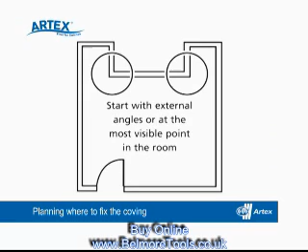Plan to start fixing the cove at the most visible point in the room. If external mitres are required for, say, a chimney breast, begin with them to ensure the best pattern match of decorative plaster cove. Alternatively, if using corners, then these must be installed before commencing installation of the cove.

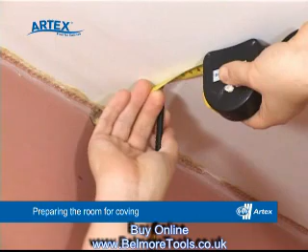Prior to the cove being installed, the walls and ceiling should be prepared. Remove any wallpaper and wash off any wallpaper paste and any traces of distemper, loose or flaking paint and plaster to ensure the surface is sound. Pencil guidelines along the wall and ceiling. The measurements will be dependent on the size of coving being fitted. On long runs, it may be advisable to flick a chalk line between the guidelines. To ensure good adhesion, score the area between the guidelines.

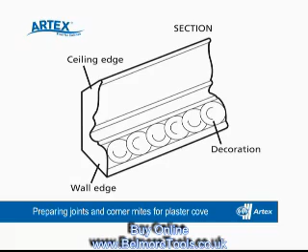Note which way up the decorative plaster cove needs to be fitted. When fitting decorative plaster cove, it is important to take care with the joints and corner mitres in order to ensure good pattern matching. All measurement marks must be made on the cove wall edge. Always try and match the pattern on butt joints and external mitres. Any mismatches may be lost in the internal mitres.

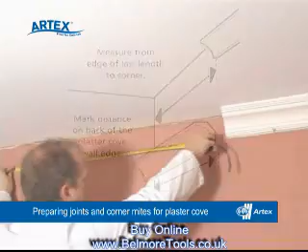So, whenever a mitre is required, measure the distance between the end of the last fixed length and the corner of the room. Mark this measurement on the back of the wall edge of the next length of plaster cove. When cutting two external mitres on the one wall, for example a chimney breast, a compromise on pattern matching may be necessary. Mismatching sections of the design along the meeting edges can be trimmed as required.

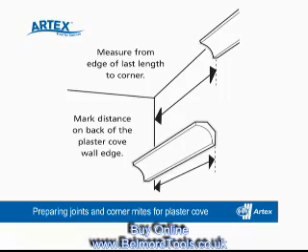When joining two pieces of decorative plaster cove, it is best to use a straight butt joint method. To cut a butt joint, place the cove in the mitre block and line up the measured mark with the upright edges at the stepped end of the block. When cutting, keep the saw lined up against both edges of the mitre block. Any gaps may be made good by using the adhesive. Once dry, these areas can be easily sanded to leave a smooth, joint-free finish.

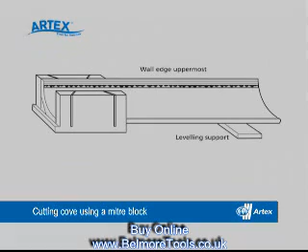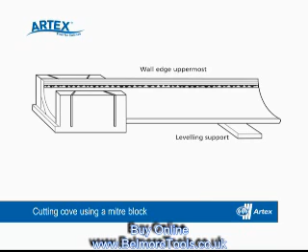When using the Artex mitre block, it is a good idea to keep the cove supported and level using a piece of wood the same thickness as the base of the mitre block. Alternatively, you can use another mitre block, which can also help when coming to cut the left and right-handed mitres. Place the cove upside down in the mitre block with the wall edge uppermost, flat against the side, and the ceiling edge flat against the base.

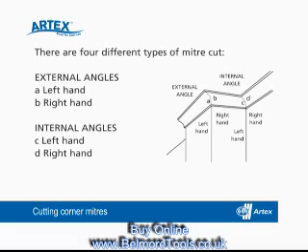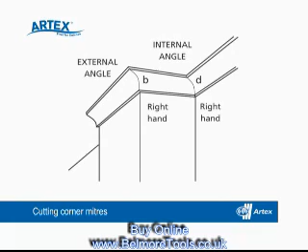There are 4 different types of mitre cut. External angles left hand, right hand, internal angles left hand, right hand. To cut a left hand corner mitre, position the mitre block to the left of the length of cove and line up the measured mark with the appropriate mitre block slot, depending on whether the angle is to be internal or external. Similarly, position the mitre block to the right of the length of cove for the right hand corners.

When fitting paper faced cove, always measure along the wall guideline when measuring and marking each length. Transfer the measurements taken from the wall to the back of the cove and mark the position of the cut required, marking up to the lip of the cove.

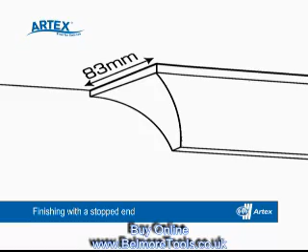A stopped end finish may be required when, say, a window extends up to the ceiling. To form a stop end, cut the end of the run of cove to an external corner. Taking a short piece of cove, cut the opposite external mitre. Measure from the mitre joint along the ceiling and transfer this measurement to the ceiling edge of the cove and cut the cove off square. The resulting wedge shape will be the stopped end.

In certain circumstances, there may be a requirement to cut corners other than right angles, for bay windows for example. Draw pencil guidelines around the perimeter of the ceiling, out from and parallel with the walls. These lines will intersect at the corners. Offer up the cove with square cut ends. Mark on the wall edge of the cove the point where the walls meet.

Without moving the cove, mark the point on the ceiling edge of the cove where the pencil lines drawn on the ceiling intersect. Hand cut the mitre between the two marks, taking care to angle the saw to allow the cut ends to meet correctly. The mitre is a line drawn between the marks on the wall and the ceiling edge of the cove.

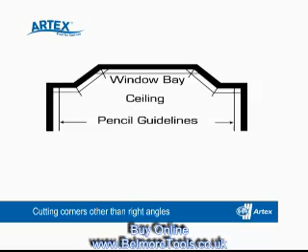When fixing either paper-faced or decorative plaster cove, use Artex multi-purpose adhesive to ensure good adhesion. Apply a generous wedge shape of Artex multi-purpose adhesive onto the back of the edges of the cove. Position the cove between the guidelines and push firmly into place. Remove the excess adhesive along the edges by using either fingers, stripping knife, corker or sponge. The excess adhesive could then be used to fill in any gaps in the joints or mitered corners.

Unwanted traces of the adhesive should be removed using a damp sponge. Tap panel pins or small nails at 600mm intervals into the wall and ceiling either side of the cove to provide additional support as the adhesive sets. Joints can be disguised and feathered out by using adhesive and a corker. Once dry, they can be lightly sanded.

Once the adhesive is dry, carefully remove any supporting pins, then fill the holes, making good with either cove joint and gap filler or adhesive before sanding smooth any areas requiring attention. Before decoration, seal the porous surface with a thorough application of Artex Cove Primer. The cove can then be painted as required.